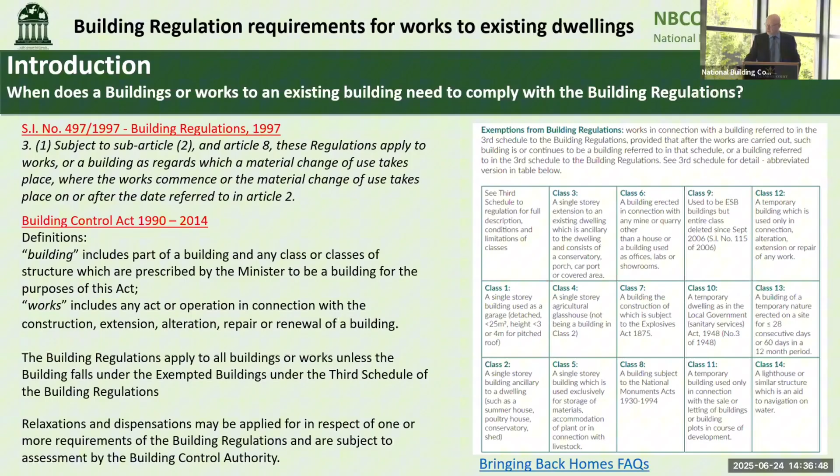So that's something you have to be careful of. And also just to say there are relaxations and dispensations, which we'll go into later on in respect to those.

So the Building Control Act - we have the sections design and construction of buildings and works, so there's means of compliance. The prima facie means of compliance is a technical guidance document. We have alternative means of compliance, code of practice, standard recommendations, ACDs or acceptable construction details, Irish standards, Irish agrement certificates, alternative national technical specifications which give an equivalency to the Irish standards, and by design.

So the functional stated aim of the provision is to illustrate what the purpose of the regulation is. It does not deal with how that regulation is complied with. So the focus is on the ends, allowing the designer to determine the best means.

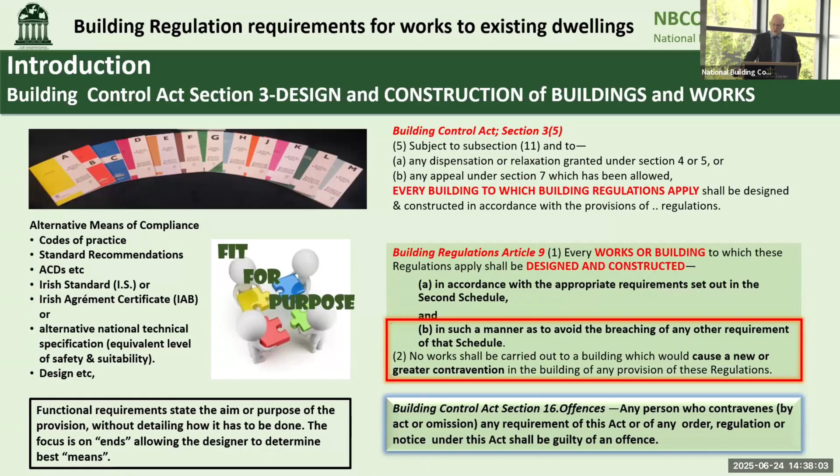And just to note, as came up before, when you're applying the building regulations you have to do it in such a manner as to avoid breaching any other requirements of the schedule, and no work should be carried out to a building that would cause a new or greater contravention in the provision of these regulations.

So we'll look at the technical guidance documents - Owen touched on them earlier on - that when you go to the technical guidance documents, if you're working on an existing building, what I would say to you is get the PDF, type in 'existing', and press return, and you'll see all the different parts of the technical guidance documents that note existing buildings and where certain technical guidance might differ when applying it to existing buildings.

So we look at TGDs. It says existing buildings and works to existing buildings, where we have material alterations or change of use of existing buildings. And just note that guidance in this document may not, in all circumstances, be appropriate.

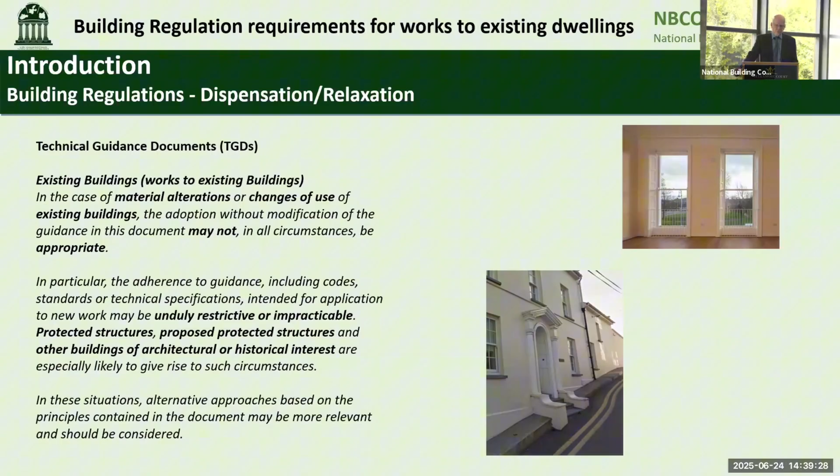It goes on to say that if you follow the technical guidance documents, it might be unduly restrictive or impractical for protected structures and proposed protected structures and other buildings of architectural or historical interest. So again, look at those relaxations of those parts of technical guidance documents which say you may be able to demonstrate compliance in a different manner. These situational alternative approaches, based on the principles contained in the document, may be more relevant and should be considered. Okay, so that's the building regulations.

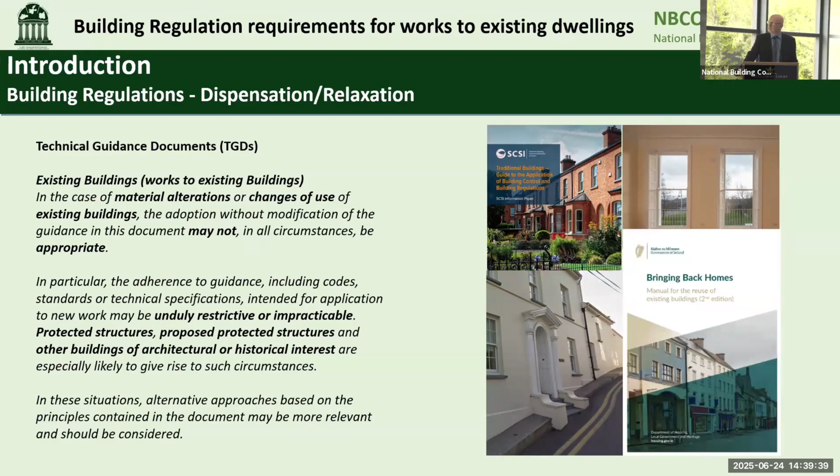Again, we talked about Bringing Back Homes and the SCSI guide there. So we have all the technical guidance documents, we have the code of practice, we have the D, and we have various different supplementary guidance. And just to note, under all these things there's always a proviso.

That we expect these works to be carried out by a competent person - we'll go into that in more detail in Part D. This person is deemed to be competent by having regard to the task he or she is required to perform, and taking account of the size and complexity of the building or works. The person possesses sufficient training, experience and knowledge appropriate to the nature of the works they're undertaking.

So just to say, all building owners or owners of works may be requested to demonstrate compliance with Parts A to M of the building regulations. So if you've undertaken works, even if they're notifiable or not, you may still be required by the Building Control Authority to present information to demonstrate compliance with all the building regulations.

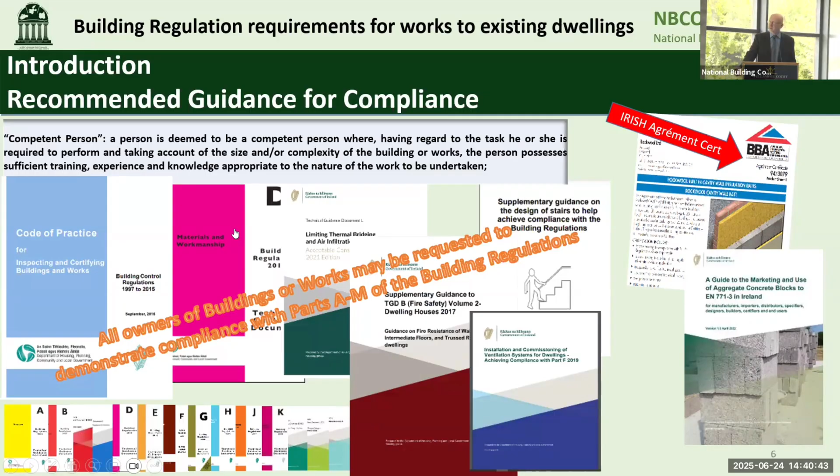So we go into Part D, which is the subject of this talk. Part D is quite a short regulation. It has two requirements and one definition. We're going to concentrate on the first requirement, which is that all works to which these regulations apply shall be carried out with proper materials and with workmanship in a workmanship-like manner.

That is very important because it illustrates that this requirement is universal. So any works where you are bringing materials onto site to do works or buildings must comply with Part D and must use proper materials.

On the definitions, it says proper materials, and it illustrates that under A, it has a CE marking, or B, has an appropriate harmonised standard or a European technical assessment, and must comply with an Irish standard, Irish Agrément, or similar specification under the Agreement on the European Economic Area.

So just to note, all works when these regulations apply must be carried out with proper materials in a workmanlike manner. I've highlighted three of the paragraphs in the technical guidance document, and we'll go through those now.

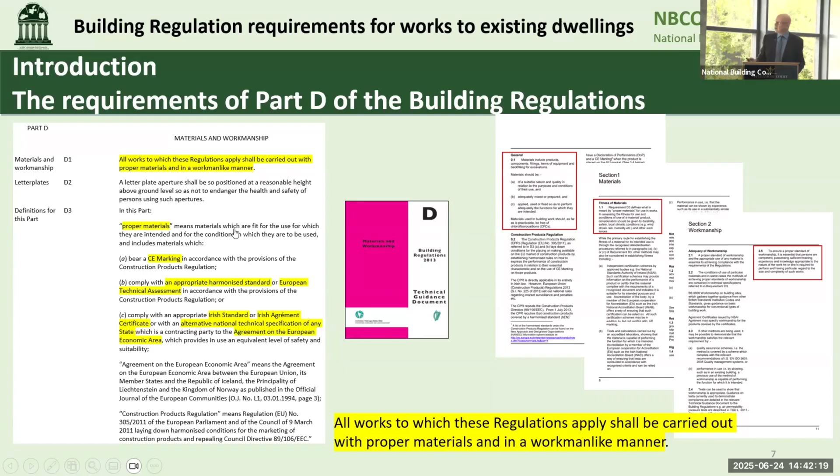The first one is on materials. It's in the general section, and it just says materials, including products, components, fittings, items or equipment, backfilling excavations, should be of suitable nature and quality in relation to the purpose and the condition of their use, and should be applied and fixed to adequately perform the function they are intended.

This comes back to where we talk about buildings being robust. So where you're talking about cladding or the fixings of cladding, where we're looking for a building to have a lifespan of 60 or 60 plus years, the things used to fix cladding, materials, anything else must be of similar robustness - should be 60 years as well. There's no point having something glued on with a chemical adhesive that's going to stop working after 30 years if the actual lifespan of the material it's applying to is 60. So those things have to be taken into consideration.

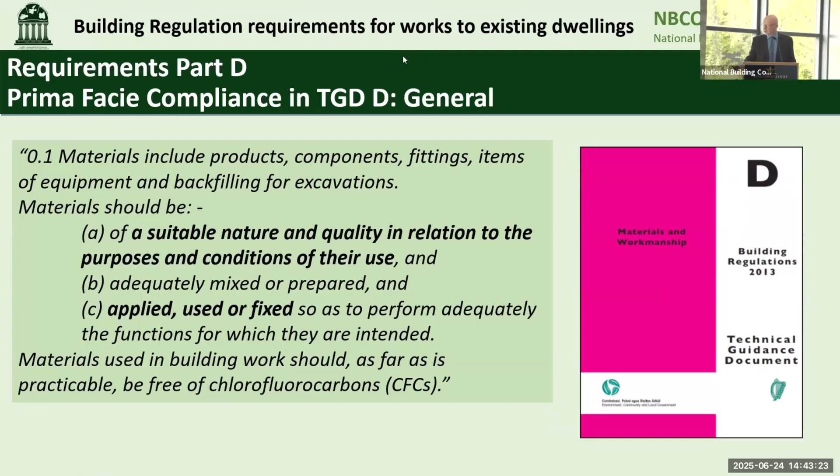And then the fitness of materials under 1.1 of the technical guidance documents notes that when you're assessing the fitness for use, consideration should be given to durability, safety, local climate conditions, e.g. wind-driven rain, humidity, etc., and other such issues.

So also, when you're considering it, you'd be considering where it's being used in the building. It mightn't be particularly relevant in this case, but if you're using steel in a swimming pool, it's a lot different to the steel you have to use in an industrial building because of the conditions of that use. Those things would have to be considered by the designer.

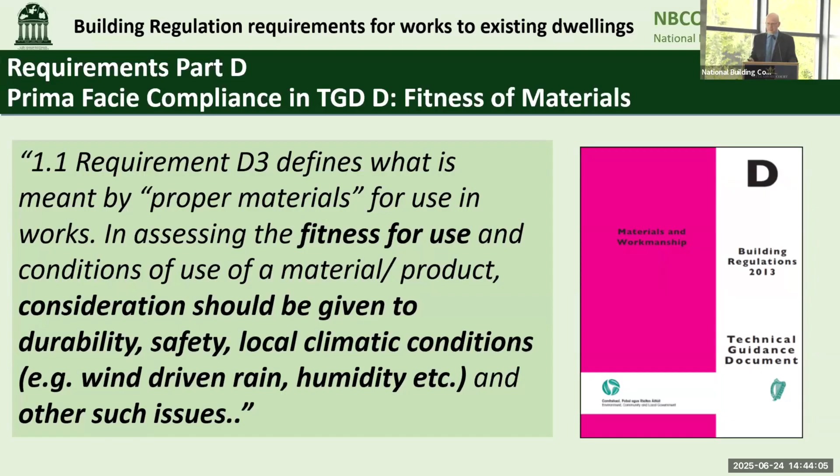And then on workmanship, it states - and this is a requirement of the building under the TGD, and this would be something that the owner, builder or designer would have to ensure to comply with the technical guidance documents - that the workmanship is to a proper standard, and that people are competent and possess sufficient training, experience and knowledge in regard to the size and complexity of such works. So all those things are in Part D.

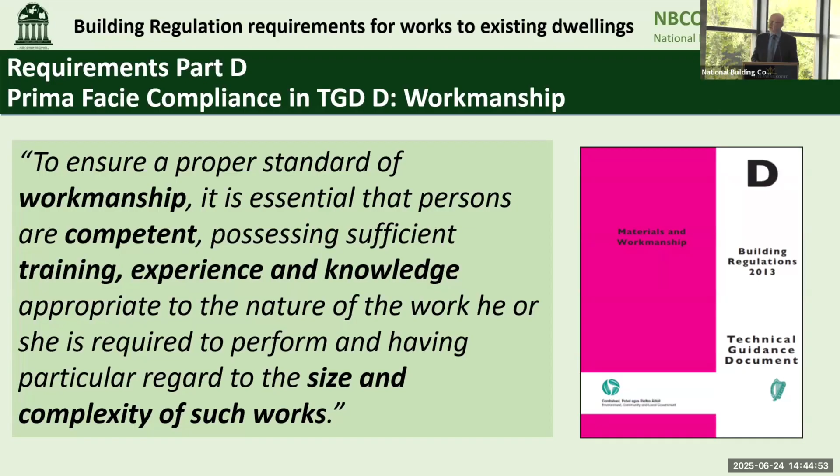So it's essential that materials have a CE marking or meet an appropriate standard, and that when they're being installed, they're installed by a person who is competent and has sufficient knowledge of the material, experience and training so that they are installed correctly.

So under requirements of Part D, Part 3A notes that it should bear a CE marking in accordance with the provisions of the EU construction product regulations. Just to note, the CPR, the construction product regulations, requires harmonized products to have a declaration of performance. The declaration of performance provides information on the performance of a product in accordance with an EU and EN harmonized standard.

We'll note that in drawing up the DOP, which is the declaration of performance, the manufacturer assumes responsibility for the conformity of the construction product with the declared performance in the DOP. Each construction product covered by a harmonized standard, or for which a European technical assessment has been issued, must have a DOP and must be marked with a CE marking.

So just to note, CE marking in the case of construction products is in conformity with the declared performance and has been assessed in accordance with the harmonized standards or the ETA issued for it. Again, there was discussion earlier about plywood. When you get plywood, it should have a CE marking to the harmonized standard, and also have a DOP stating what the different performances of that plywood are.

Again, how you would put that plywood into a construction is part of the design. For instance, 12mm plywood will have a CE marking, you can go and buy it, but it's not suitable for use as flooring because it's too thin. So the CE marking does not mean that a product is automatically suitable for the purpose that people put it to.

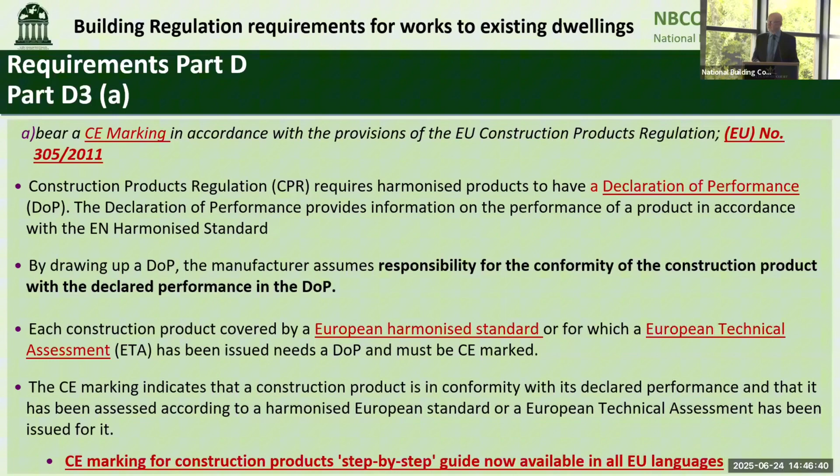So if you look at Part D, requirement 3B, you have to comply with appropriate harmonized standards or European technical assessments in accordance with the provisions of the construction products regulations. An example here is I.S. EN 13242:2002, aggregates for unbound and hydraulically bound materials for use in civil engineering works and road construction. It has to comply with the national provisions, S.R. 21, which is the national guidance for the application of that particular standard.

It incorporates Annex E, which goes to T0, T1, T2, and T3, different types of hardcore. On the right-hand side is a breakdown of the different types of hardcore required. In the insert on the bottom left-hand corner, it shows an extract of Technical Guidance Document C, which relates directly to the provision of hardcore below slabs, and notes that you have to have a permeable layer of T2, which is for gas permeability underneath the radon barrier.

So when you're getting delivery of aggregates on site, you should have a DOP and a CE marking, possibly in one document, received by the builder to illustrate that the product being used on site complies. So even if you're doing a small extension, it's essential that you get your builder or designer to ensure they've correlated all these CE markings and DOPs, because as an owner or designer, you may be asked to produce these to illustrate compliance.

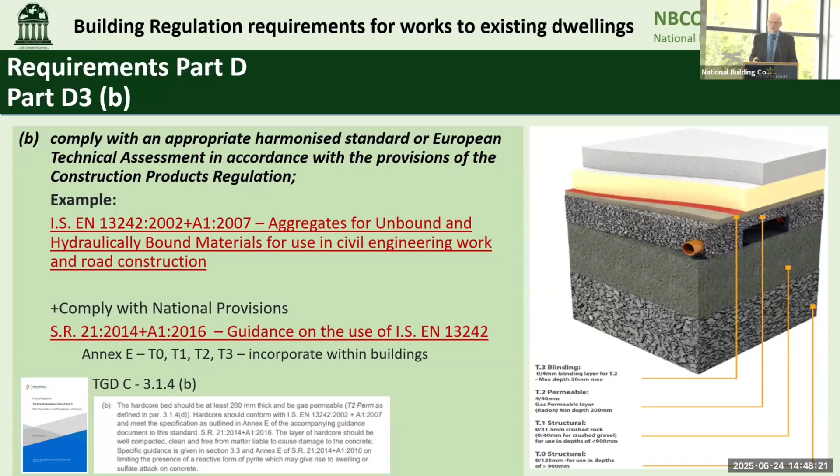There's a brief note on European technical assessments - that's another way of getting a CE marking. CE markings are generally based on harmonized standards, but there's a secondary route where a manufacturer might go for a European technical assessment, which provides an independent European procedure for assessing essential characteristics for non-standard construction products. Again, it's for a new product or one that doesn't have a harmonized standard.

The manufacturer can go through this process, and at the end of it, they can produce a CE marking and the DOP. Again, that has to be reviewed by the designer or the owner's representative, at least, to ensure that the product and the DOPs are suitable for use in the situation it's being put into.

So you might have an ETA for a cement board from Germany, which is perfectly good for the German climate. The DOP wouldn't pass muster in Ireland because we have a different climate and different requirements, so it would have to be assessed against the location where it's being used.

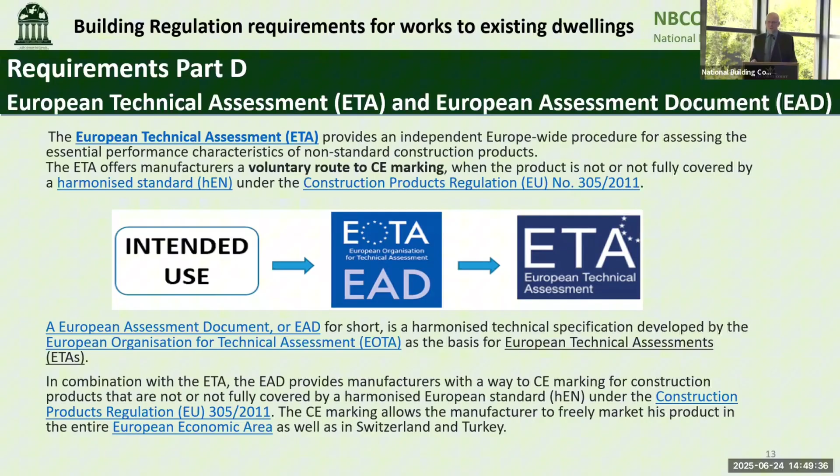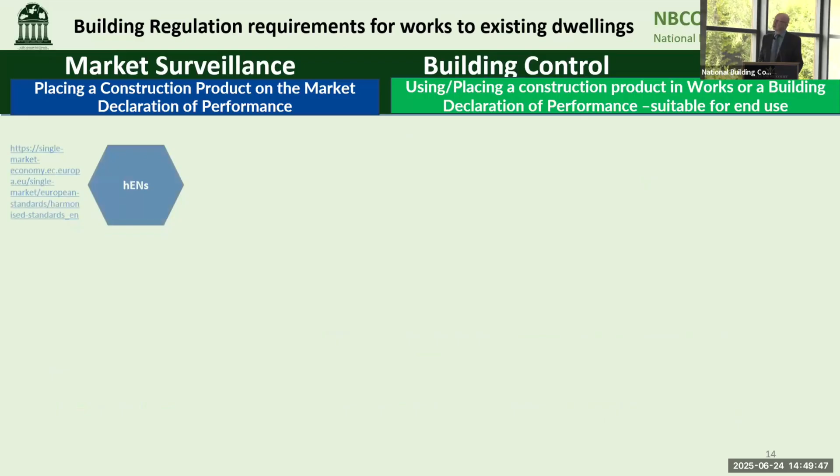Just to show the difference between market surveillance and building control: we have the harmonized standards, we have ETAs and AVCPs. They all feed into the DOP and CE marking. All that does is illustrate that the product has been manufactured to a certain standard, and that the manufacturer is manufacturing it in accordance with those requirements.

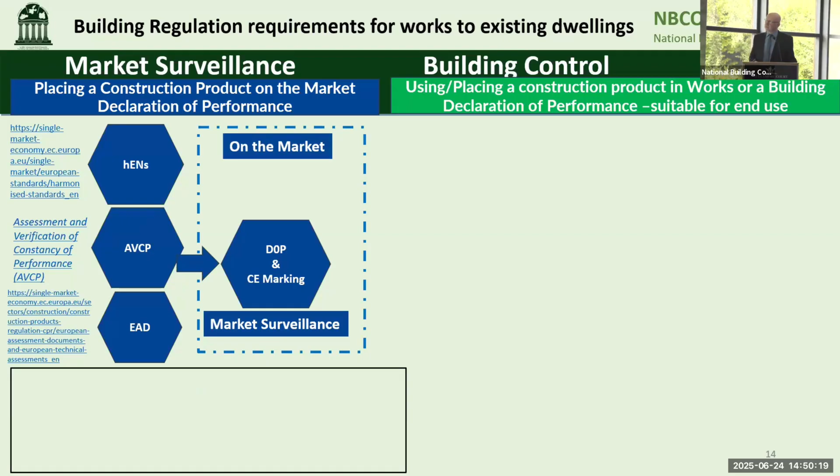The legislation is the Construction Products Regulations, and the responsibility for compliance with that particular material rests with the economic operator. But then when you get to placing it in the construction, you have to look at the use. You have to take into consideration the national provisions, the S.R.s, Parts A to M, Technical Guidance Documents A to M, and look at the DOP and CE marking.

Does it actually comply with those requirements? Is it compliant with the building regulations? Is it fit for the purpose it's being used for? And is it being put together in a workmanlike manner? Is the workmanship up to scratch, and has it been properly installed?

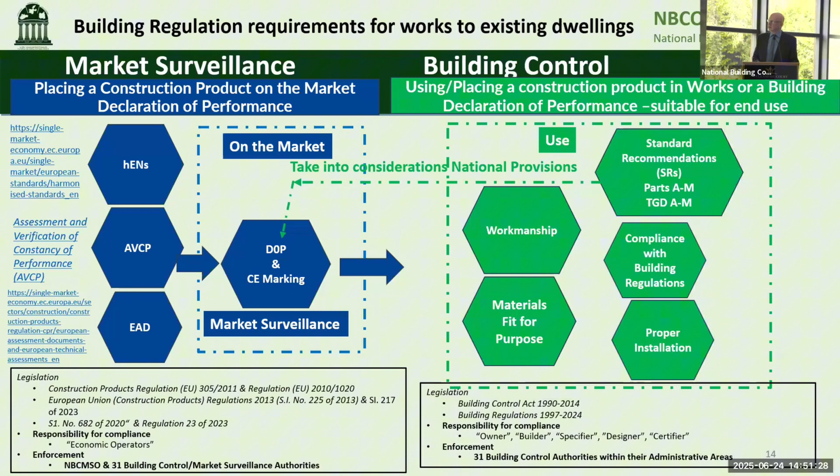The legislation here is the Building Control Act and building regulations, and responsibility for compliance of that material falls on the owner, builder, specifier, designer, and certifier. Once it's been installed, they are taking that responsibility. If the product is faulty because of the manufacturer, it relies on the manufacturer. If the incorrect product was put in by the owner, designer, or builder, it's their responsibility under Part D.

So requirements of Part D say you must comply with appropriate national standards, Agrément certificates, or any alternative national specifications of states that are contracting parties to the agreement on the European Economic Area, provided they offer an equivalent level of safety. So for Irish standards, we have I.S. 440, for instance, for timber frame. You also have Agrément certificates, which are usually given for systems.

For instance, external wall insulation - the other Agrément certificate that would be common is for radon, because that doesn't have a European harmonized standard, so radon barriers fall under Agrément certificates.

Further information can be found at the NSAI on alternative standards which show an equivalent level of safety and suitability. You can use, there's three there: BRE Global Assurance, FM Approvals, and the National Standards Authority of Ireland. They are all technical assessment bodies, and they can be used to undertake a technical assessment for an ETA, under the European Organisation for Technical Assessment.

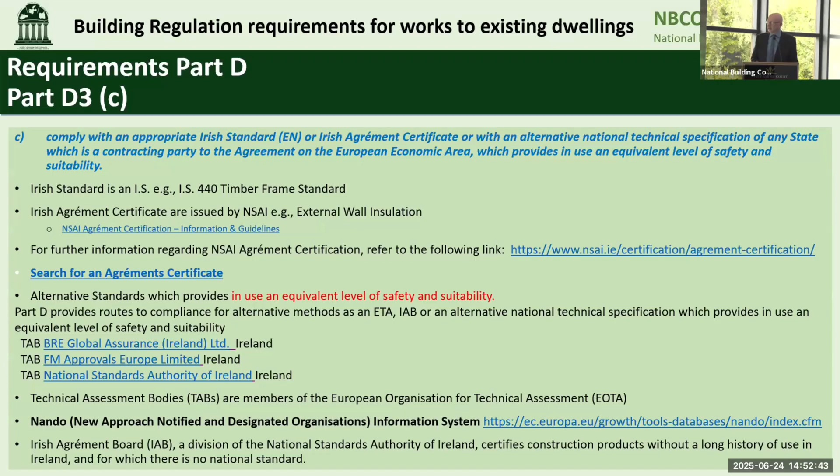So D is all about workmanship materials. We have D1, all works, products and materials supplied, to be carried out in a proper materials workmanship-like manner. Then under Technical Guidance Document D, we note again that for materials likely to be adversely affected by condensation, moisture from the ground, or airborne moisture such as rain or snow, the construction should prevent the passage of moisture to the material, and the material should be treated or otherwise protected from moisture.

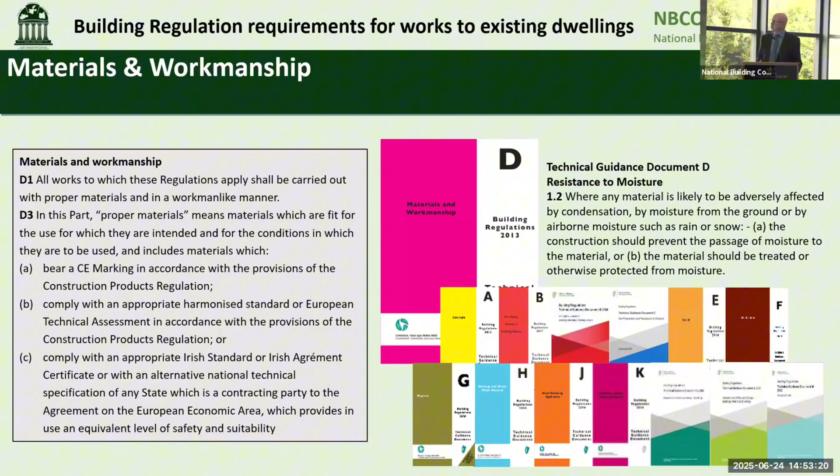Again, that leads to storage on site. Blocks are not meant to be wet in general - they should be stored in a dry area. On the left-hand side, you see blocks sitting in standing water. By capillary action, the water is going up into the blocks themselves, which can have a detrimental effect on them.

If there's a cold weather event, there might be freeze-thaw action. Blocks have no declared performance for freeze-thaw action, so you have to ensure they're protected, covered, and not exposed to extremely cold weather. Similarly, they shouldn't be installed while wet, because if they're sealed in by plaster etc., that moisture still has to get out through the structure, which might lead to mold or other issues or efflorescence, affecting the quality of the building.

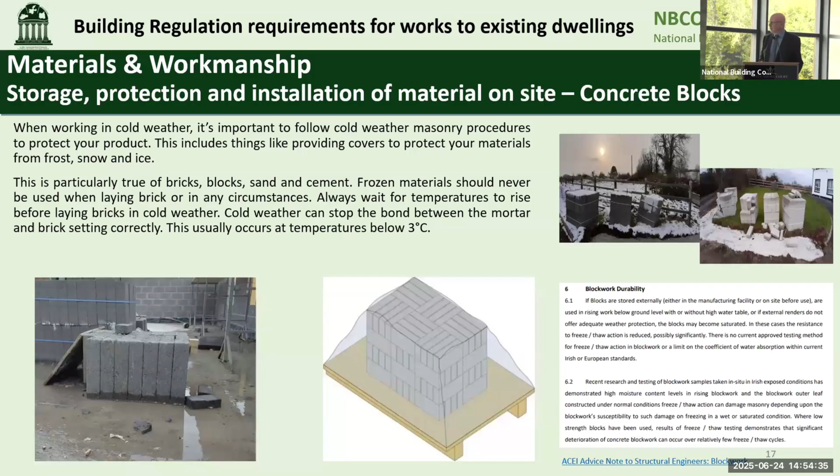On the right-hand side, there's an extract - an advice note from the ACEI about structural blockwork under SR 325.

Again, we look at moisture and storage. We have materials stored on site where the windows were open and rain is coming through. You've got gypsum boarding here on the left-hand side, already showing signs of mold on the bottom left-hand side, even though it hasn't been completely finished yet, because those materials have been left out.

Under the paragraph insert on the bottom left-hand side, it says flooring should not be carried out until the dwelling has been glazed and is substantially watertight. Again, because of speed of construction, those things are sometimes avoided or shortcut, and they proceed with installing materials where the building is not watertight, which can lead to issues later on.

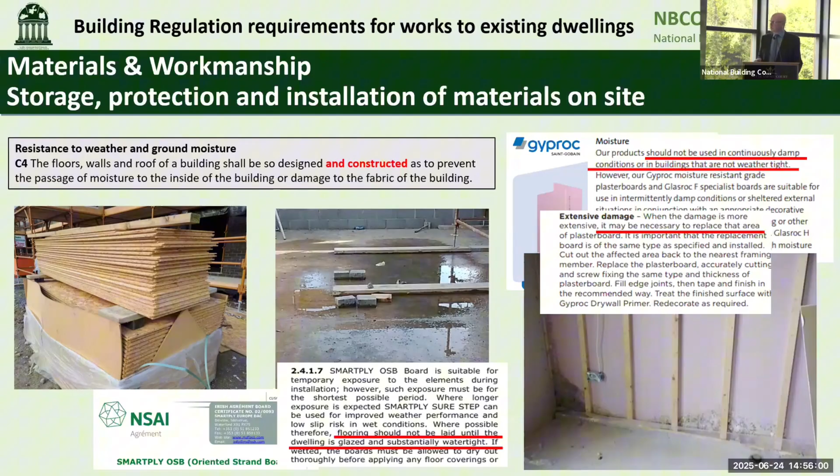A note on the right-hand side: Gyproc products should not be used in continuous damp conditions or in buildings that are not weathertight, and it notes that if there's extensive damage, it might need to be replaced. Especially with gypsum materials, if exposed to water for a long time, the characteristics of the plasterboard change and they're no longer fit for use and may need to be removed - especially specialist fire boards, because the manufacturer may not stand over those boards if they got too wet.

The blockwork is covered by SR 325, which talks about the durability of masonry and exposure to weather - to minimize it, to ensure it isn't getting wet when installed. If that does happen, you have to get the water out through render, because it's wet and trying to escape.

You get efflorescence on internal walls where moisture is escaping, showing that these materials weren't properly stored before being installed, and now those issues are coming back. If that was plastered, you might get salt crystals behind the plaster, and you might get it bubbling out.

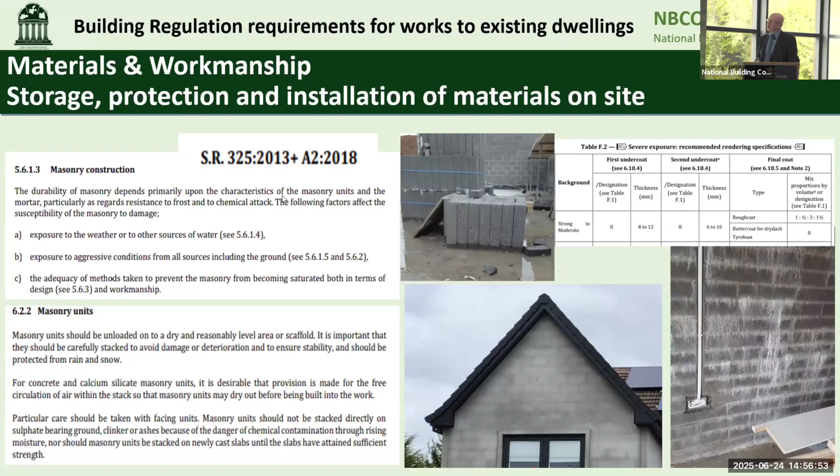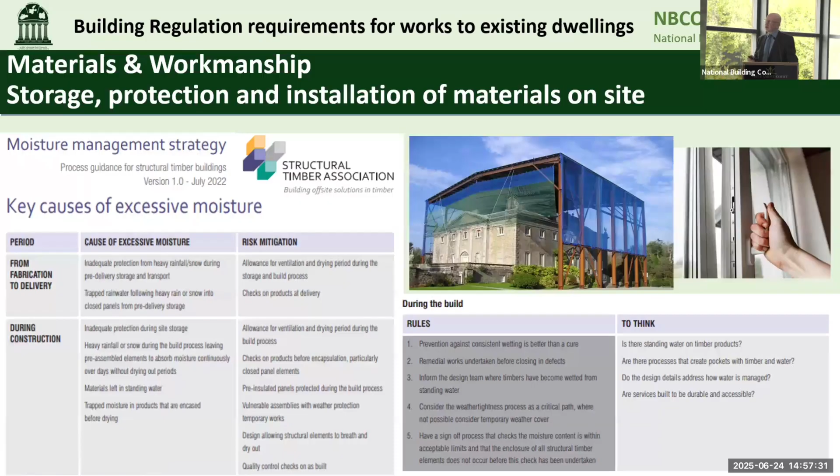Again, when we look at protection - this is a refit of Westport House, where during construction they actually covered the building so they could work on it, meaning materials weren't exposed to weather during construction. That's slightly excessive, but for internal finishes which aren't meant to be exposed to water, rain, or moisture, if you don't protect them properly you may cause issues later on - especially with plasterboard, or metal studding where the studs start rusting, and other issues which may arise.

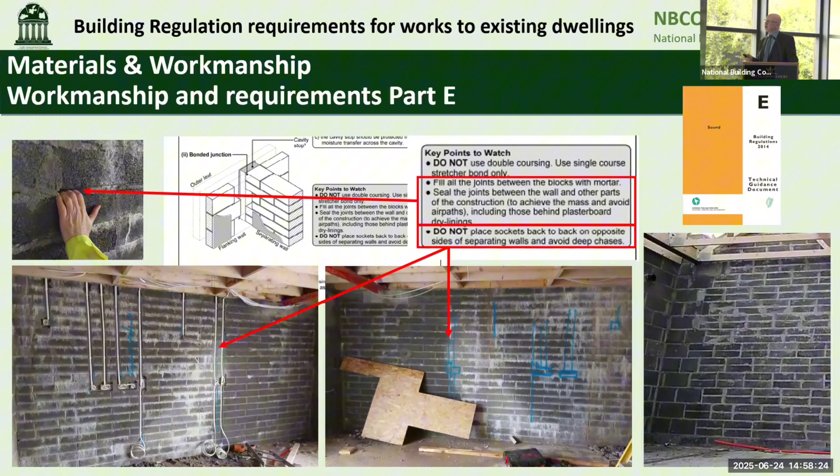Again, just noting the different bits - in terms of workmanship, you can actually put your hand in some of the horizontal joints, showing they're not fully filled. They aren't in compliance with Part E, and by reference, Part D as well.

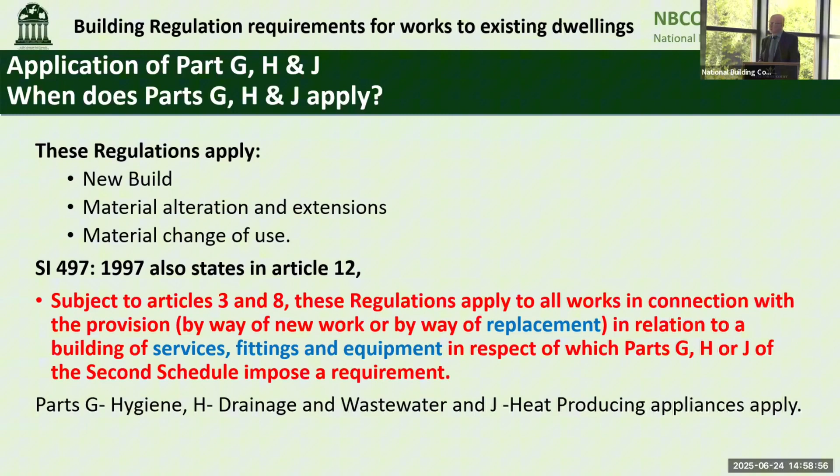So we'll just have a quick look at Part G, J, and H. They are slightly different to the other regulations. We say that if you refurbish any of these services, whether it be during material alteration, new build, or material change of use, anything that is replaced will have to be replaced to the standard of G, J, and H.

For instance, under Part G, where an existing WC suite comprising a close-coupled cistern and pan has been replaced by a manual flushing device, it should be a dual flush facility as described. If the flushing cistern alone is changed without changing the pan, you just keep the same flushing device. A single flush should not be replaced by a dual flush when the pan is remaining. So if you change the type of suite, you have to change the flushing device, but if you're just changing the header tank, so to speak, you don't have to.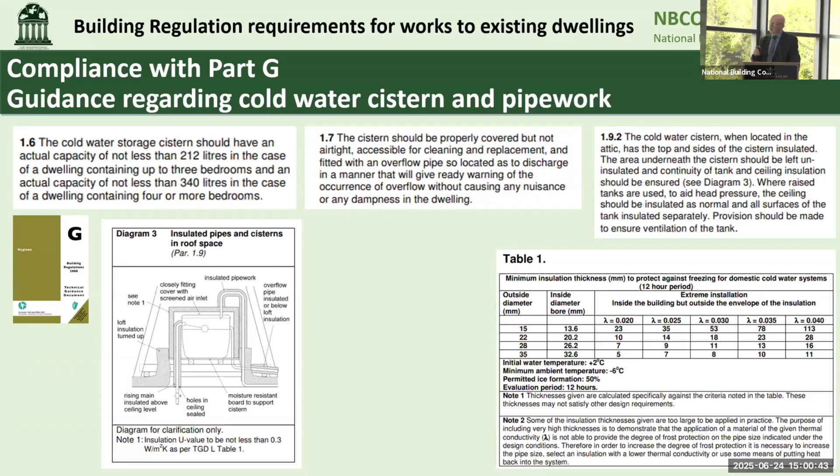Again, looking at Part G, it gives you a definition of how much water you should have in the case of a dwelling with 3 bedrooms. So if you're increasing your bedrooms from 3 to 5, you would have to increase the tank, and all the works have to be in compliance with technical guidance document G. Similarly, if you're increasing the occupancy in your house from 3 to 5, say, you will have to look at your septic tank, the code of practice regarding its capacity, and upgrade it to comply with Part H.

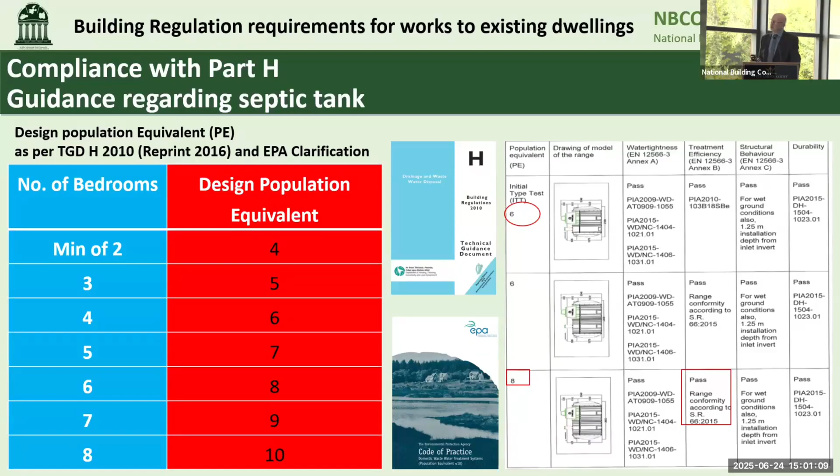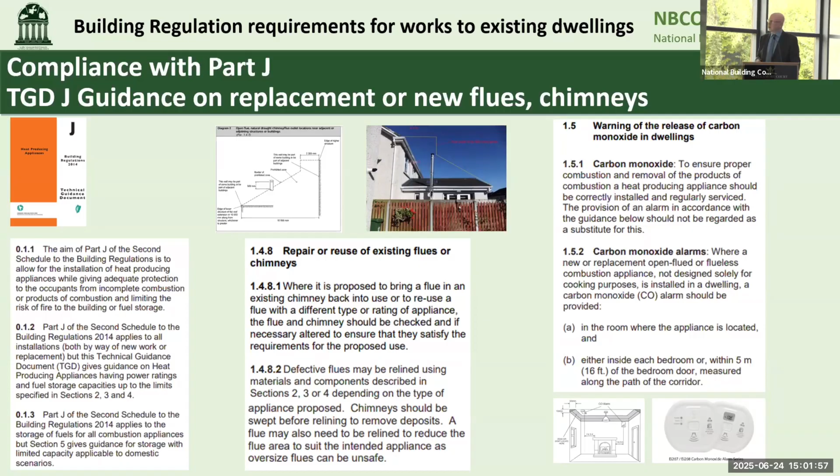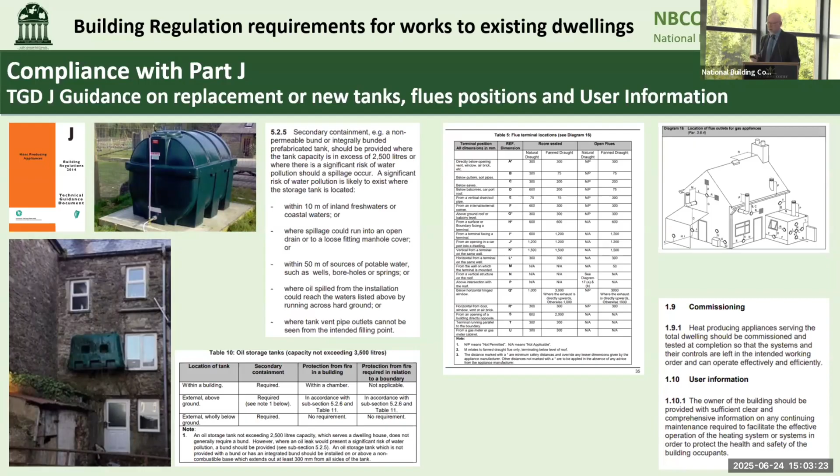Again, on the right-hand side there's a diagram showing where all the different flue locations can be taken out in relation to windows and other flues, with the dimensions detailed as well. So if you're putting a new flue in, you have to comply with these regulations. And on the bottom right-hand corner, regarding commissioning, it's essential that the building owner is given all the commissioning certs and instruction manuals for any systems installed—heating systems, ventilation systems, drainage systems, air recovery systems, whatever they are. Those all have to be contained in a maintenance manual so they know what they have and how it can be maintained.

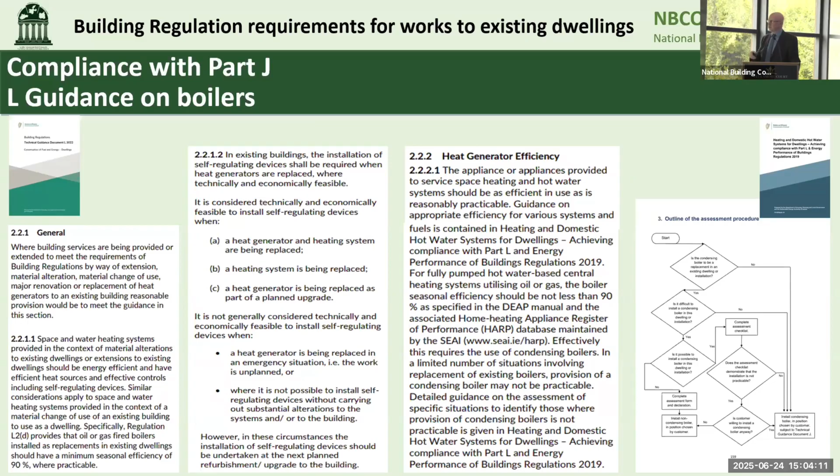Again, I won't go into this, but under Part L it covers the requirement if you're replacing your boiler—it has to be a 90% efficient boiler. There may be occasions where you can't get a 90%, or can't replace the boiler because of access issues. So in the document on the right-hand side there's a flow chart allowing you to assess the procedure and whether you should replace it or are able to maintain it. Usually, once an existing one comes to end of life, you would replace it with the correct boiler, but in the interim, if you're just doing a small extension, you can leave the existing boiler in place until it's replaced.

And that's it for me.